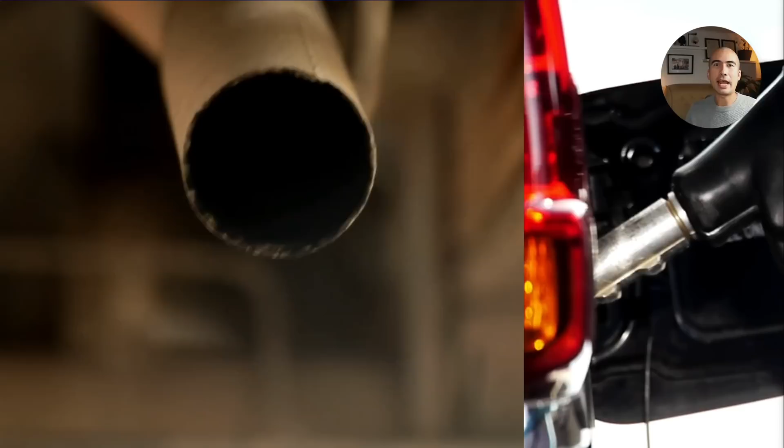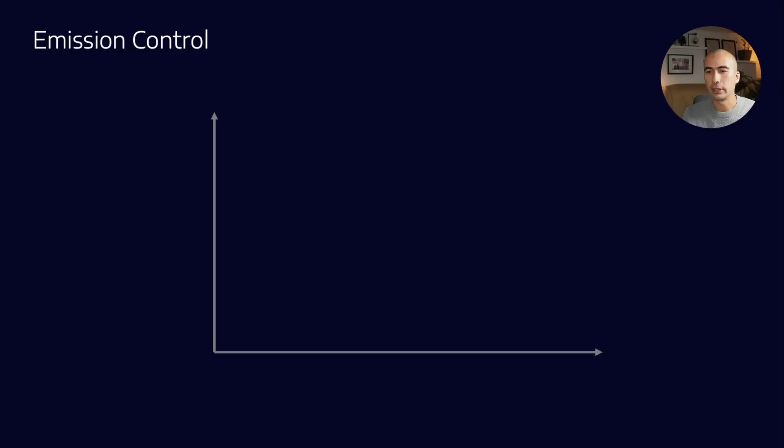So why is it that I split those two up? Let's look at emissions control for starters, and let's look at just the diesel engine oil specs. So as an example, there was mostly a focus on NOx as well as particulate matter. NOx is obviously the nitrogen compounds, and particulate matter is just solid particles in the exhaust.

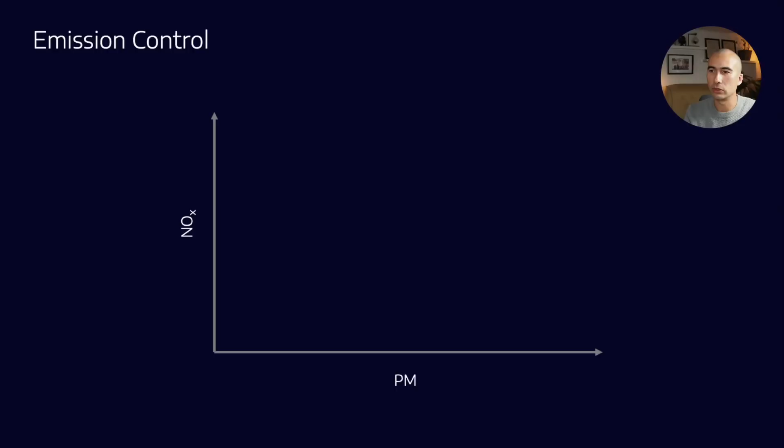And if you go back to what the CG4 regulations look like, when we moved on to CH4, it was a reduction in NOx. CI4 was a further reduction in NOx. And then we started emphasizing the particulate matter when we went to the CI4+.

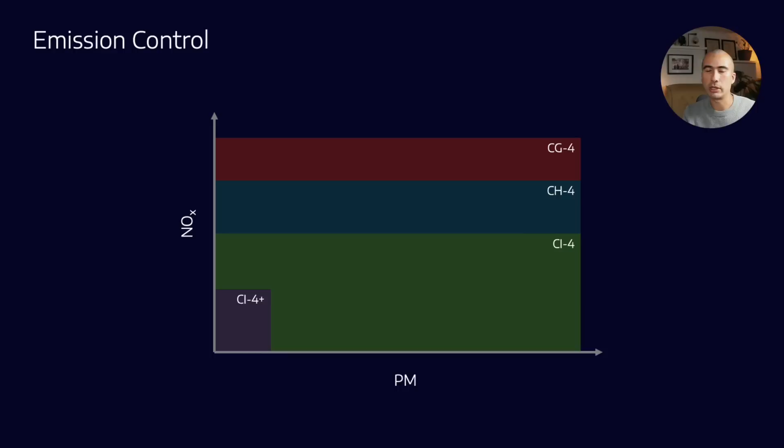And what you can see is that the allowable window of NOx and particulate matter got narrower and narrower as we went along. And if you had to put some years to it, that's really an evolution that happens from the mid-1990s right through to 2010. And obviously now we have the CJ4 spec. So to just put some numbers to it, you look at the reductions, and it's absolutely massive, and it's been a bit of a game changer.

Now, the oil regulations, or the self-regulation really of the industry, has gone along in conjunction with developments on the OEM side as well. So how did engine manufacturers and car manufacturers also meet all these quite stringent regulations?

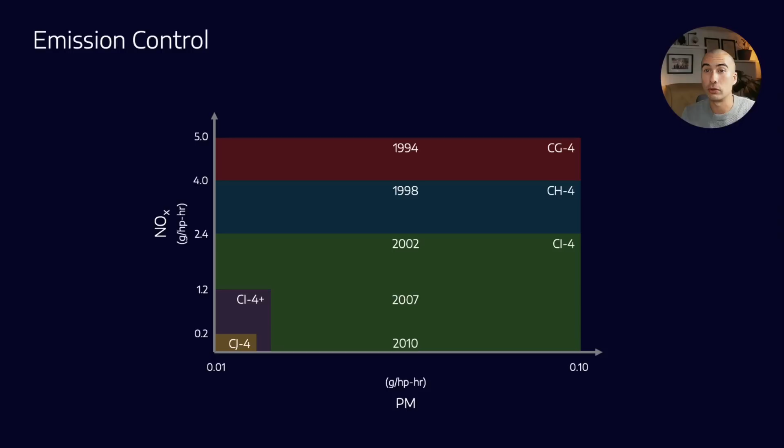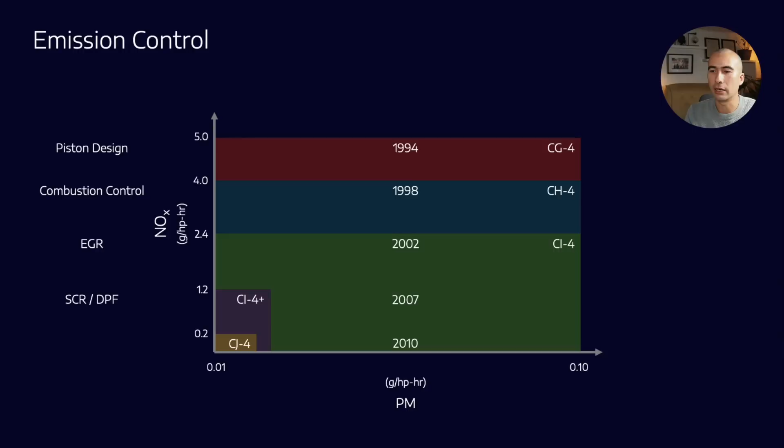Well, back in the 1990s, it was all about changing piston design. Then we had combustion control measures come in, things like exhaust gas recirculation, and then SCR and DPFs. That really helped us. And then on the fuel side, we also had a reduction in the amount of sulfur that was in the fuel, from 500 parts per million right down to 15 parts per million, which you would call ultra low sulfur diesel.

Now, if you just strip away all the detail and look at the progress we've made from the CG to the CJ4 spec, you can see that the window of allowable NOx and particulate matter has shrunk vastly, to the point where when they came to do the CK4 regulations, they realized most of the low-hanging fruit had already been taken up. Trying to reduce NOx and particulate matter from CJ to CK4 wasn't really going to help any. So the only other real emission you can control is carbon dioxide emissions.

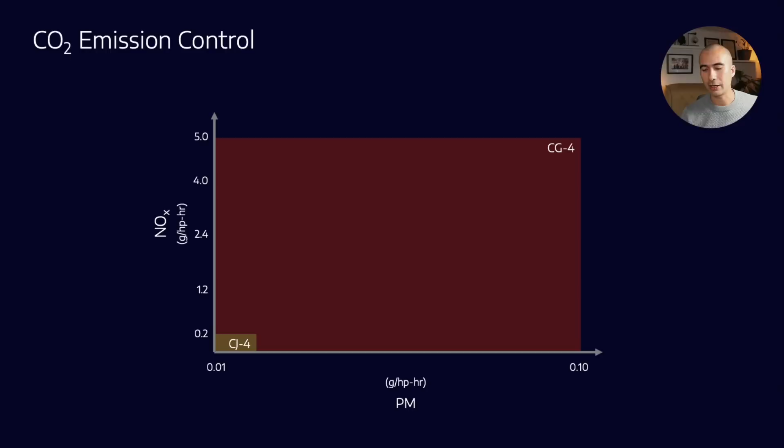Now, carbon dioxide emissions—trying to fix those at the tailpipe is a very difficult proposition. So the reality of CO2 emission controls is that you have to move into fuel efficiency, which just means you burn less fuel and therefore less carbon dioxide comes out the tailpipe. If you map miles per gallon, or fuel efficiency, against years for all types of vehicles, you see a very similar trend line, and it has a lot to do with market forces as well as government forces.

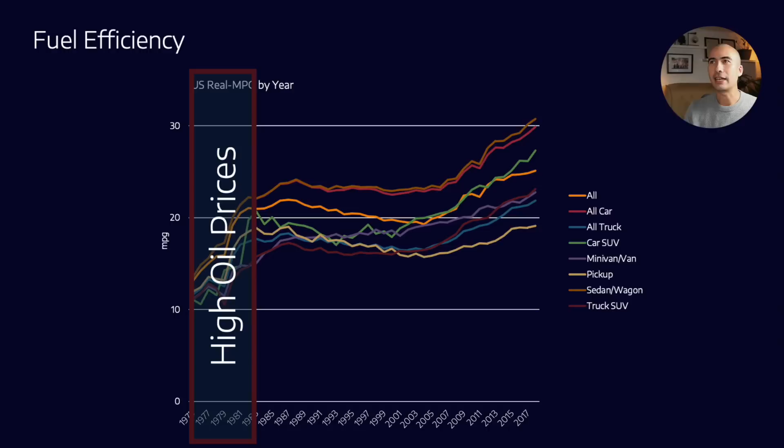If you stretch back into the 1970s—for those of us who were around at the time, that's not myself, but some people on the call may have been around and aware of the oil shocks of that time—when there was a period of really high oil prices, that drove the OEMs to gain much more fuel efficiency, because it was in their interest, and in the interest of the consumer.

After that, in the period from the 1980s through the early 2000s, we had relatively stable oil prices. We didn't have those massive oil shocks brought about by turmoil in the Middle East, as well as the cartel behavior of OPEC, all that kind of stuff. So with stable oil prices, there was less incentive to improve mileage on vehicles, and we saw a relative stagnation. From a regulatory framework standpoint, that's when you saw the emphasis shift to NOx and particulate matter emissions.

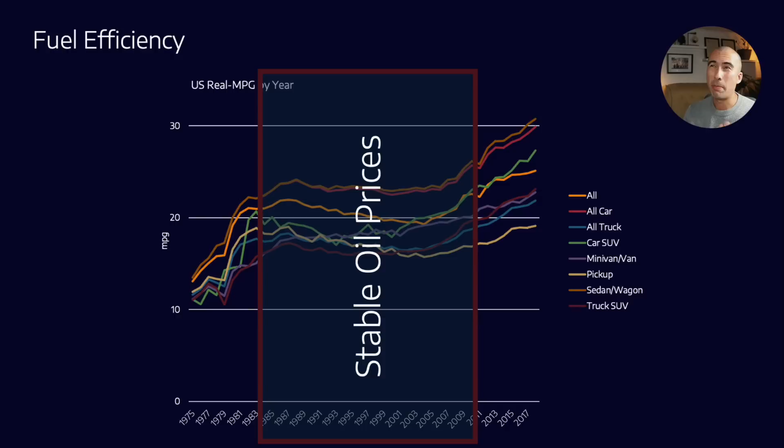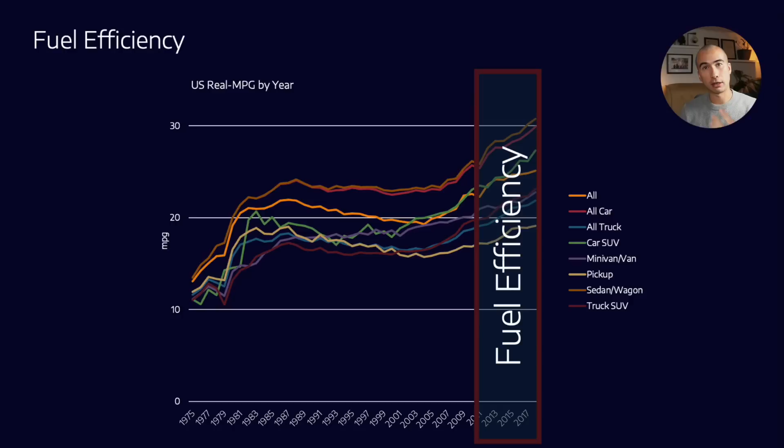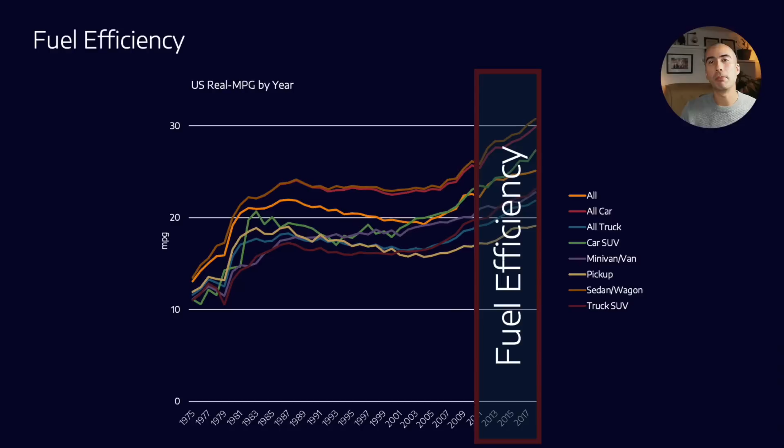If everyone can remember back to 2008, the oil price hit about $140 a barrel, which is really, really expensive. That, along with a lot of these sustainability criteria being brought around—a lot more emphasis on things like climate change—and government intervention, has made requirements on OEMs become a lot more stringent, particularly in Europe. That's where we've gone back to that fuel efficiency age, where now the OEMs are trying to eke out many more miles per gallon, as much as they can.

All right, so that's one story. Then we've also got the idea of changing market conditions. One thing you'll notice on the chart I put up with the emissions control is the reduction in sulfur that happened with the actual diesel. That actually happened in the lubricant space as well. So there are two triggers for that.

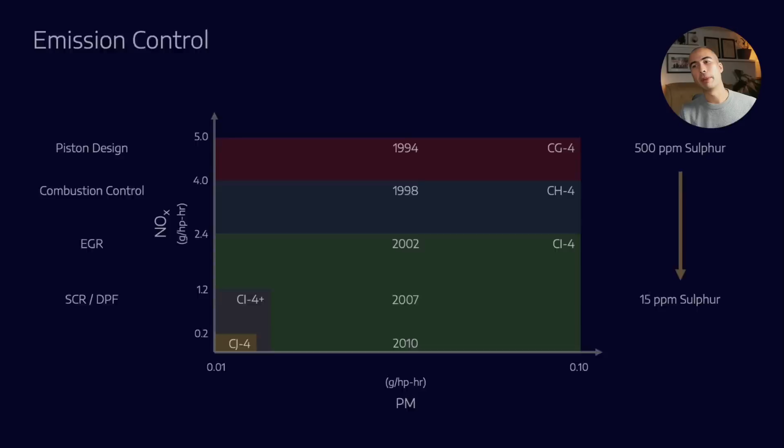One is that we just want to reduce the amount of sulfur, because sulfur compounds in the tailpipe can produce things like acid rain. If we have too much sulfur in the atmosphere, it's generally bad for the environment. The other thing sulfur and phosphorus—which is sort of the cousin to sulfur—do is poison the catalysts in our exhaust systems. So there was a move on the part of the base oil providers to move to lower sulfur compounds.

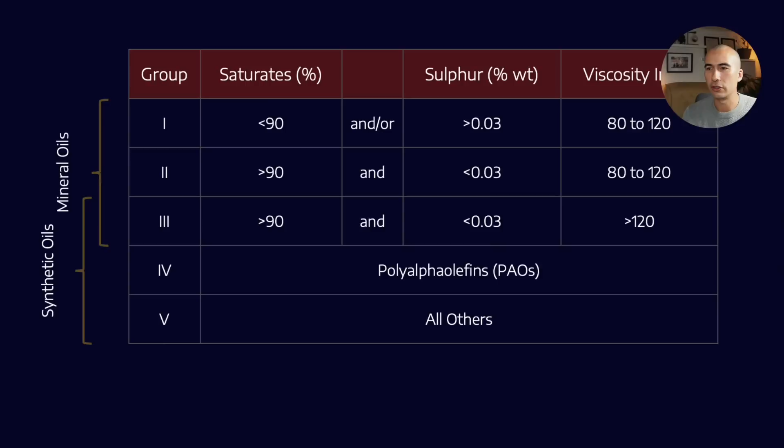Now, for anyone who's not familiar, base oils are grouped into what we call the 5 API groups. Groups 1, 2, and 3 are what we would call mineral oils, and the distinguishing factor between those is more or less the sulfur content. You can see over here that the sulfur content of a Group 1 is much higher than that of a Group 2 and a Group 3.

Now, Groups 3, 4, and 5 are known as synthetics, and I'll get into a bit how Group 3 came to be known as, or regarded as, a synthetic oil. But what that really drove was a move away from Group 1 oils, which were in many ways the standard in a lot of diesel engine oils, as well as passenger vehicle motor oils.

That drove us into what you would commonly call higher quality base stocks—Group 2, Group 3, and Group 4. So market forces helped drive engine oils away from Group 1s into what we would call higher quality—I use air quotes because Group 1s are very good in very specific applications, but in vehicles where you want a high viscosity index, meaning the viscosity changes very little with temperature, you want a Group 2 through 4.

Alongside that, we also have a paradigm of changing legal definitions. And in order to tell this story, which is really the story of how minerals became synthetics and how marketing departments all over the world kind of screwed up the nomenclature, I've got to take you back to the 1990s.

In the 1990s, things were much simpler. In the lubricant space and in the oil markets, a mineral was very obviously a group 1, group 2, or group 3 oil. And if you had something synthetic, that very clearly referred to a PAO, which is a polyalpha olefin, a PAG, which is a polyalkylene glycol, an ester, or an alkylated naphthalene.

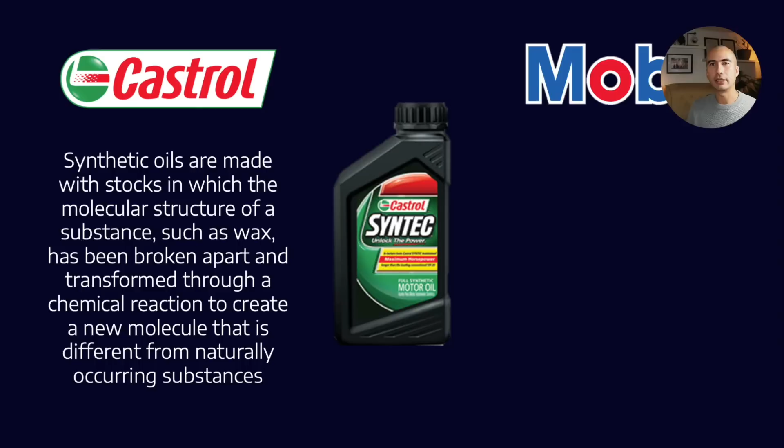So I guess if I were to take the side of Castrol, the argument you would make is something like engineered timber, which you use to construct a house. That has been so fundamentally changed from its raw product, which is a tree. By chopping it up into small particulates and including resins and all that kind of stuff, we have so fundamentally changed it that a tree and an engineered timber are completely unrecognizable from each other, and therefore engineered timber would be a quote-unquote synthetic product.

So that was the argument that Castrol was making. On their side, they happened to have some pretty good witnesses who'd actually won the Nobel Prize in chemistry not all that long ago. And so that was a reasonably convincing argument.

On Mobil's side, they said, hold up - the industry norm and what has always been understood is that synthetics are formulated from very small molecules. We subject them to a chemical reaction. These are not derived from crude oil that comes out of the ground.

So as an example, with a polyalpha olefin, you start off with ethylene gas - so it's a very pure feedstock, if you like. And by reacting those molecules together, you can build a much larger molecule, which gets you to a PAO.

As expert witnesses, they were able to bring in the EPA of the United States, the Environmental Protection Agency. Funnily enough, Exxon was on their side - you've got to remember this was pre-merger, so Exxon and Mobil were two entirely separate companies. They also brought evidence from Castrol's own website at the time. Now, late 1990s, so the websites weren't all that great, but you can imagine that Castrol's own website was effectively saying that the synthetic definition agrees with Mobil.

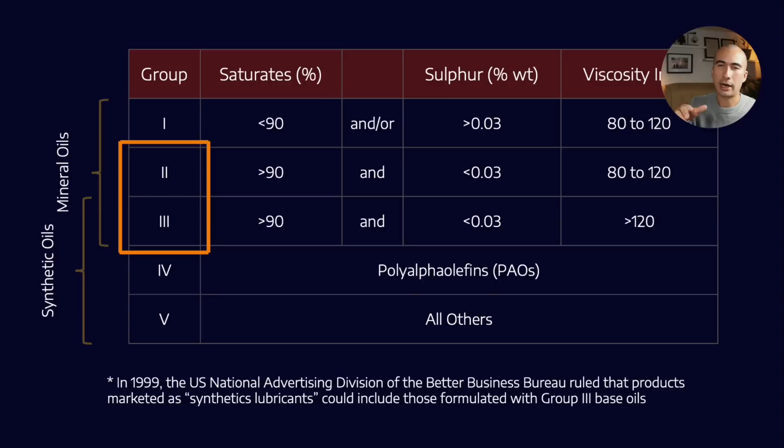All right, let's talk about the next factor helping to drive changes in engine oils, and that's changing base oil technologies. You might think that base oil technology is kind of fixed, right? We've had minerals and we have PAO synthetics. It's been like that pretty much since the 1970s, and there really hasn't been all that much evolution.

But in fact, there's been quite a lot of moves in the base oil space, and the big player I'll talk about here in the engine oil market has been the rise of what we call gas to liquid technologies. Obviously new technologies in the refining space are expensive, they take a lot of money, and you've got to build a lot of infrastructure. So any changes happen quite slowly.

The gas to liquids process is predicated on the idea that you can take small molecules and turn them into larger ones. If that sounds familiar, that's exactly how I described the process of making a full synthetic Group 4 PAO, right? You take ethylene gas, react them together, and get a very pure, high VI product in a PAO. With GTL technology, they've taken that fundamental idea and said, well, natural gas is predominantly methane. Let's use a very similar process to get ourselves to a product that looks a lot like a Group 4.

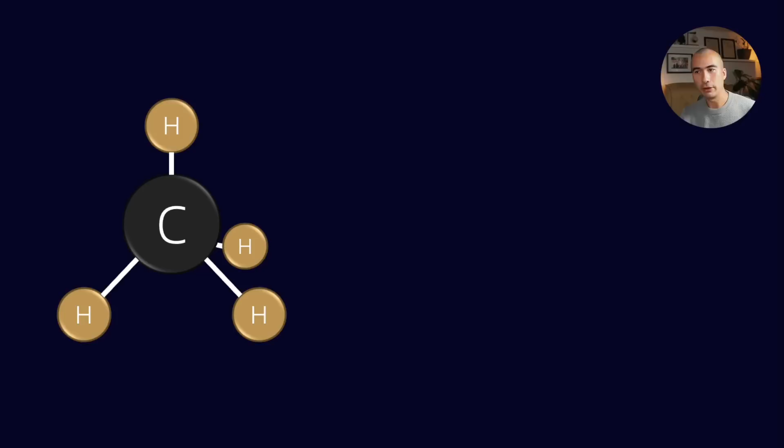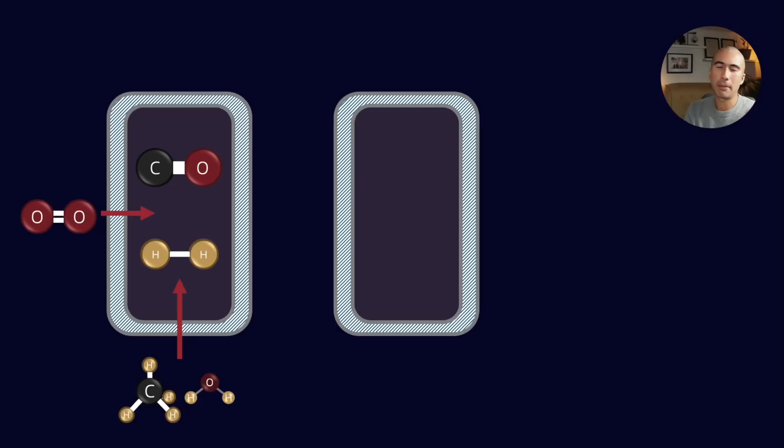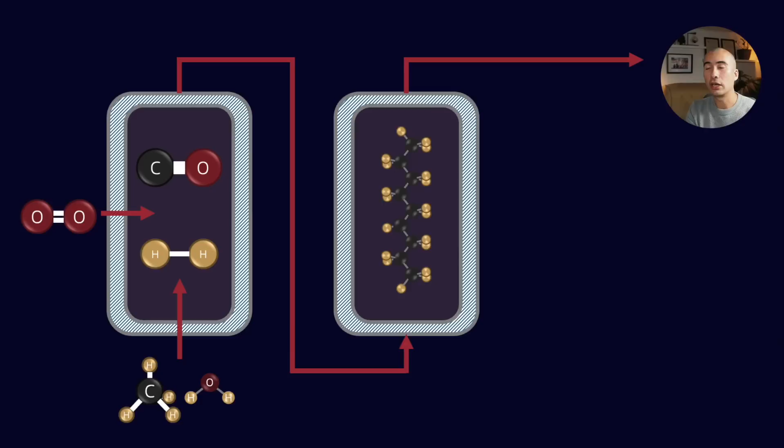The actual chemical process used is called Fischer-Tropsch. You don't really need to know how it works, but the quick rundown is: you take methane, water, and oxygen, react them together, and you get carbon monoxide and hydrogen. Once that moves on, you can effectively turn these into long chain waxes. Using these waxes, you can either sell that wax, or put those paraffin molecules through what's called an isomerization process, and get yourself either naphtha, diesel, or lubricant.

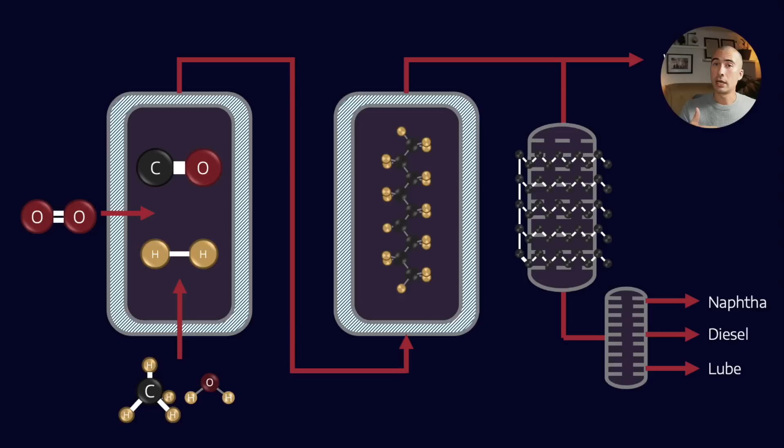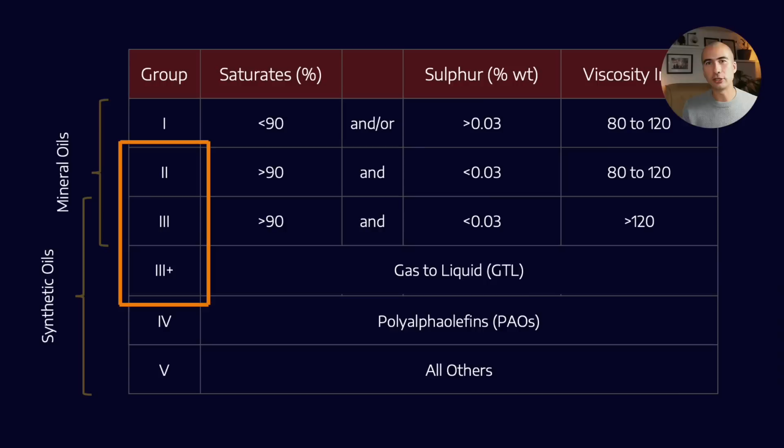Now, the biggest proponent of this is Shell. They have a huge facility in Qatar, the Pearl GTL plant, and they make vast quantities of it, and they're the biggest player in the market. Shell Base Oils actually sells this product into other companies, in the same way that ExxonMobil Chemicals sells their PAO technology on the open market to everyone. Shell Base Oils also sells the GTL product to everyone. And so that's really changed the shape of what this chart looks like, because now you can insert another line, which is Group 3 plus, and it's not quite as good, but has comparable properties to a polyalpha olefin, but at a lower price point.

Now, I might jump in here briefly, because you're probably asking: if this is such a good technology, why isn't everyone leveraging GTL technology? This goes back, again, to the way that oil companies operate. You've got to remember it's a huge investment to make a facility like this. In fact, ExxonMobil was the original pioneer of the GTL technology, and they ended up licensing, I believe, and ultimately selling it to Shell.

Now, the reason for that, you might think, if Shell has been so successful in promoting these on the open market, why is it that other companies haven't jumped in? It's been a very profitable business for Shell, and in many ways, the demand is oversubscribed. They actually can't produce enough GTL to keep up. So you might think, well, that's a really good thing for Shell.

At the same time, times like what we're living through now is when they kick themselves that they have this GTL technology. Because of what's going on in Europe at the moment with extremely high gas prices, most oil companies would much prefer to take the natural gas they derive out of the ground, send it over to Europe, and sell it at a huge premium. That's what they really want to do. But because Shell has committed to putting a huge amount of gas through their refinery, turning it into GTL liquids, they're constrained in doing that.

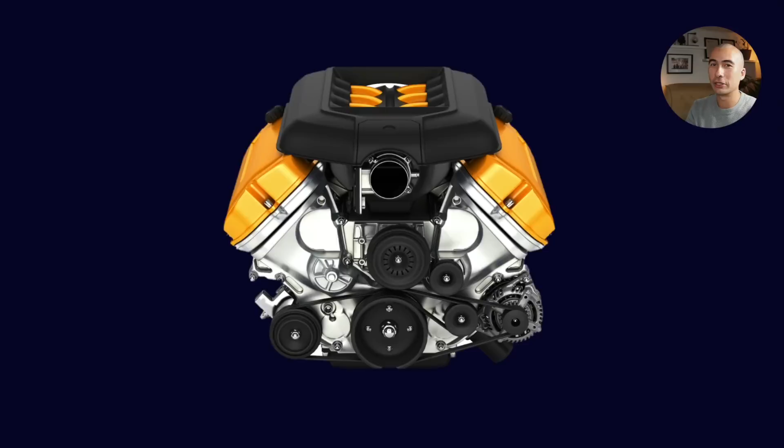Now, why is this new service category required? What are some of the changes in engine technology that precipitate new oil technologies? Well, it all comes down to this mantra of fuel efficiency. The way OEMs have gone about it is to introduce a number of changes to our cars. One thing you've probably noticed is that engines are getting much smaller. Before, a 1 to 2 liter engine would have been laughed at, but these days that's reasonably common.

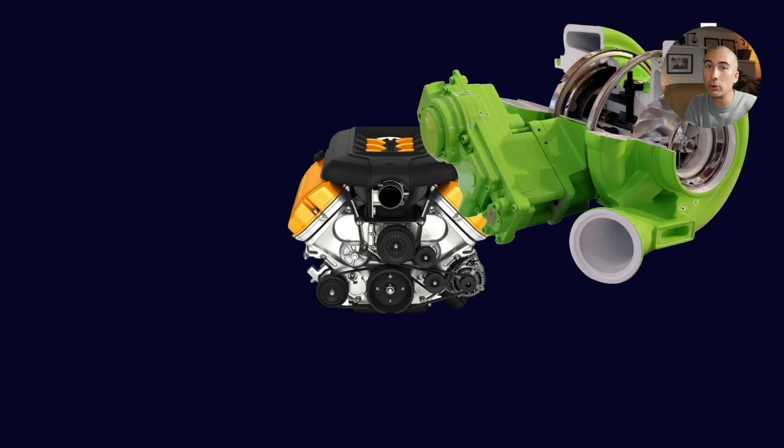One of the other things much more common in the modern era is turbochargers. You see small turbos on virtually all cars. Direct injection, stop-start at the lights - I know that's an annoyance for almost everyone, but that has become a very common technology that you really didn't see pre-2010. Hybrids are another way of getting fuel efficiency, and of course changes in the formulation.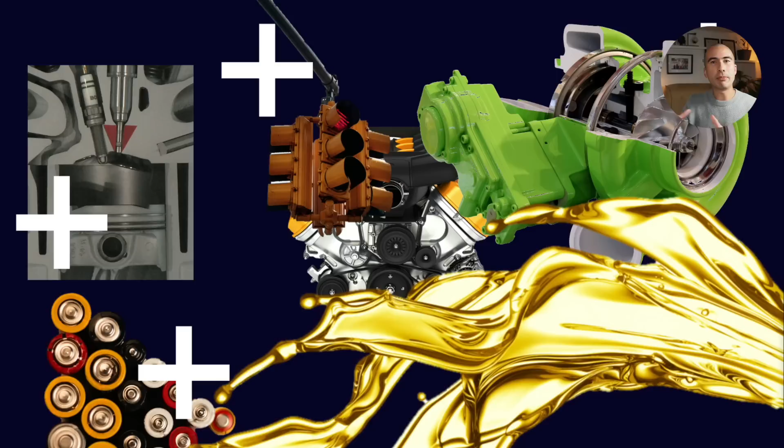But anytime we make these changes, there are unintended consequences. And probably the biggest unintended consequence of all the recent changes has been LSPI. Now, I'm probably preaching to the converted here - you probably know this phenomenon better than I do. But just to cover it, LSPI is low speed pre-ignition, and it's a little bit different. I'm going to show the standard combustion cycle here.

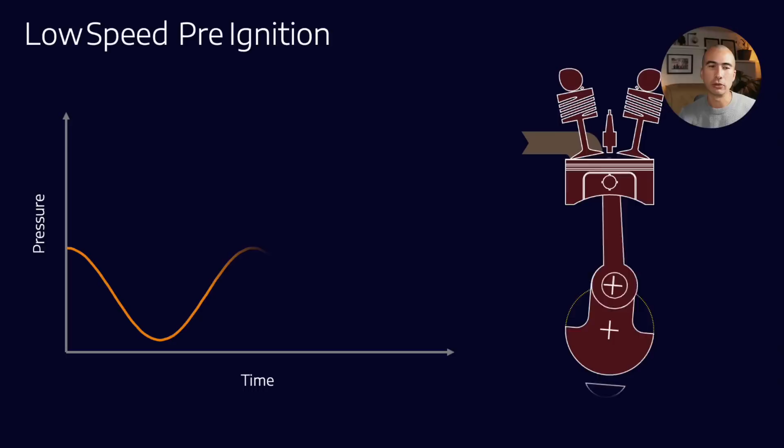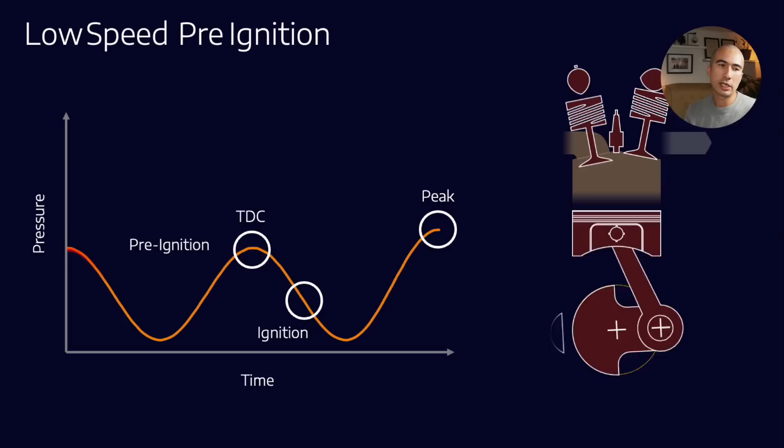You expect what we'd call a waveform, which looks pretty regular. Ignition happens - the spark ignition that happens in most cars - happens a little bit after top dead center. Now, with low speed pre-ignition, what effectively happens is we have an ignition event that occurs before top dead center, causing a wavefront going in opposition to the motion of the cylinder, and that causes all kinds of vibrations, which ultimately are really bad for the engine.

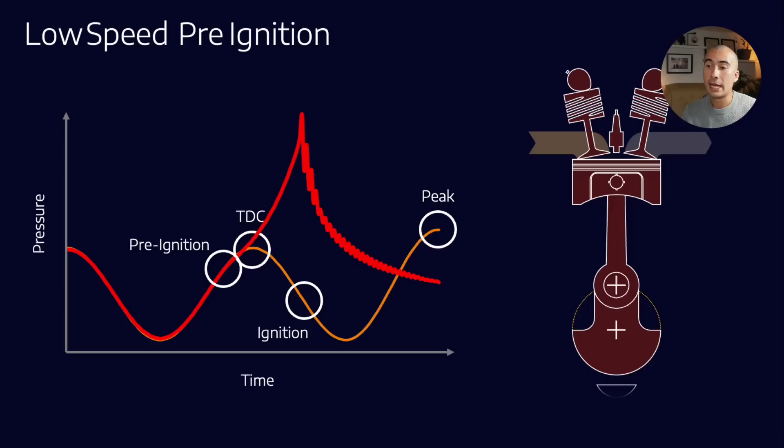Now, the OEMs have been working really hard trying to pin down the exact causes of LSPI. The reality is it's still a bit of an unsolved murder, if you like, but they've been able to narrow it down to a few common causes. One factor is that it's called low speed pre-ignition because it tends to occur at lower speeds and higher loads. It's much more common in turbocharged direct injection engines.

So again, that points to a lot of the new technologies that we've brought about to enhance fuel efficiency. But on the lubricant side, one thing that was maybe not well understood until quite recently is the fact that detergent chemistry plays a part.

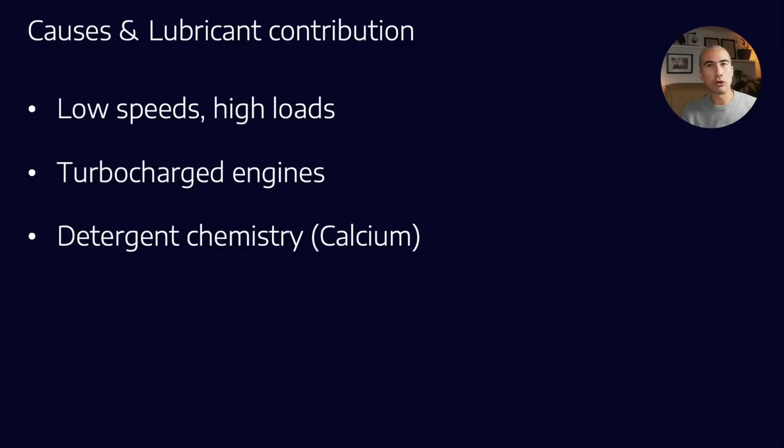Now, you might be saying, what exactly are detergents and what do they do? Funnily enough, the detergent in your engine oil operates much the same as the detergents you use at home. This picture always amuses people - this is not a grade 10 chemistry class. But what it is, basically, is a molecule that is trying to attach itself to polar compounds.

So let's go back and review a little bit. When I use soap in a sink, what I'm trying to do is remove grease that's on, let's say, my plate when I'm doing the washing up. So most of the bulk liquid is water, and I want a molecule that is soluble in water but will attach itself to grease and then help the grease be washed away.

Now, detergents in oils are exactly the same, but they work in reverse. Rather than everything being water, everything is oil, and they're trying to attach themselves to molecules that look like water - polar compounds - and that's how detergents work. Detergents have a little tail, which is generally a long chain of oil, and the head, which is charged, is generally a metal. So there are calcium based detergents, magnesium based detergents, sodium based detergents, and things like that.

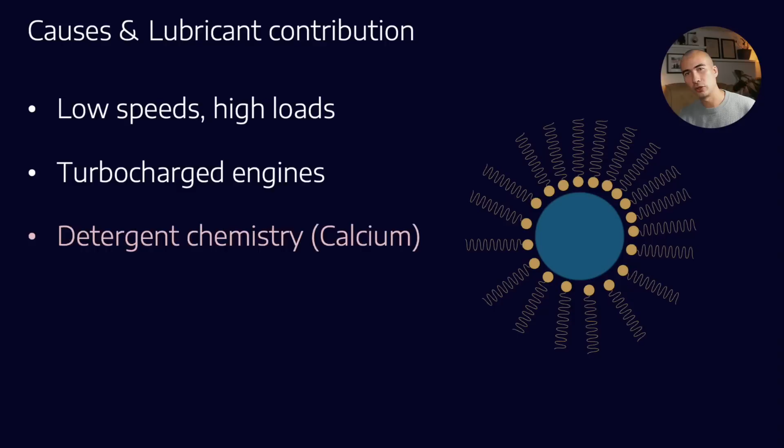What we found was that calcium detergents, which were far and away the most common in the industry, were actually causing LSPI. That's driving us towards removing the calcium in a lot of formulations, and that will change how engine oils look. Now, when you look at the evolution of, let's say, the S category, from the 1990s right up until now, we had SH, SJ, SL, SM, SN, SN+, which was a bit of a stopgap because SP was taking so long. And then finally, we've gotten ourselves to SP, which is the GF6 category.

Now, with SH, there was an additional one test over the previous. Then we had one test for SJ, 4 for SL, 1 for SM, 1 for SN, an additional 1 for SN+. The SP classification has required an extra 7 tests to pass. And this is all because of LSPI.

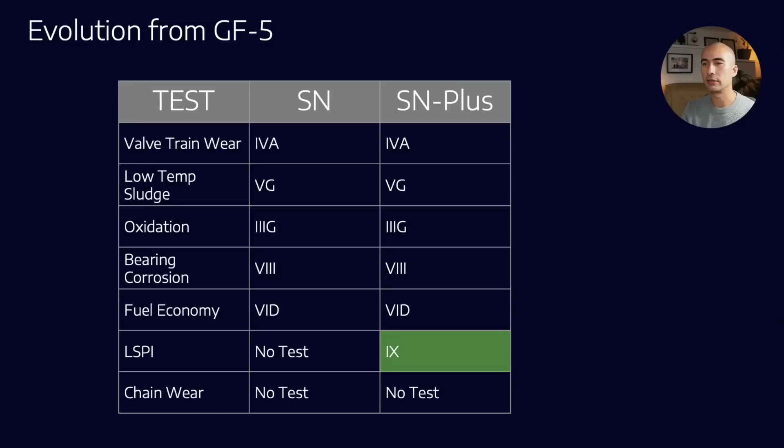So if we look at the actual tests, and the evolution from GF5, we had the SN category. There were a certain number of tests that your oil needed to pass. SP was taking forever, so we put in an interim measure with SN+, which had one additional test to confirm that your lubricant was not a contributing factor to LSPI. And then with SP, we introduced a whole raft of different changes.

And they're all driven by very specific things that we're trying to accomplish. So we're trying to get better fuel economy - remember I said we are in the fuel efficiency age. Everything about engines and lubricants is about trying to improve fuel economy. We also want LSPI protection, because that was an unintended consequence of a lot of the changes the OEM has made.

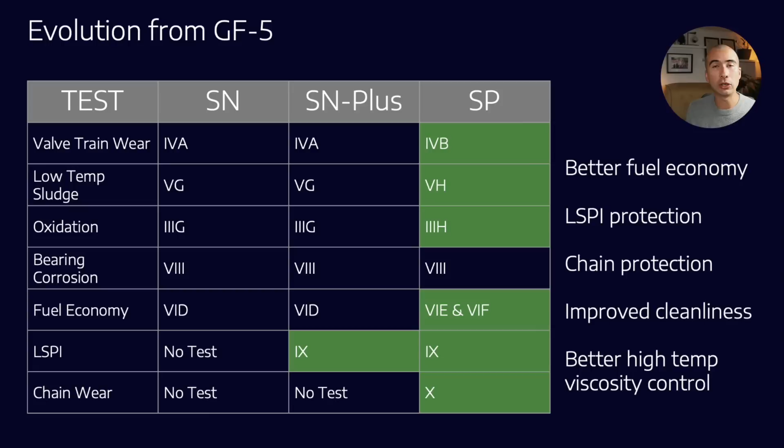We want chain protection, improved cleanliness, and better high temperature viscosity control. Some engines are running at higher temperatures now, and that oxidizes the oil faster and could potentially cause more deposits in the system. So that's why we want to improve the cleanliness of the formulations.

So what does that mean going forward? For better fuel economy, ultimately it's going to lead to lower viscosities. I remember the first time I heard that there was a 0W20 in production - that seemed completely insane to me. Now we have a 0W16. So lower viscosities - if you have a less viscous fluid, the engine has to do less work to move that fluid, and because we lose less energy, that results in better fuel economy.

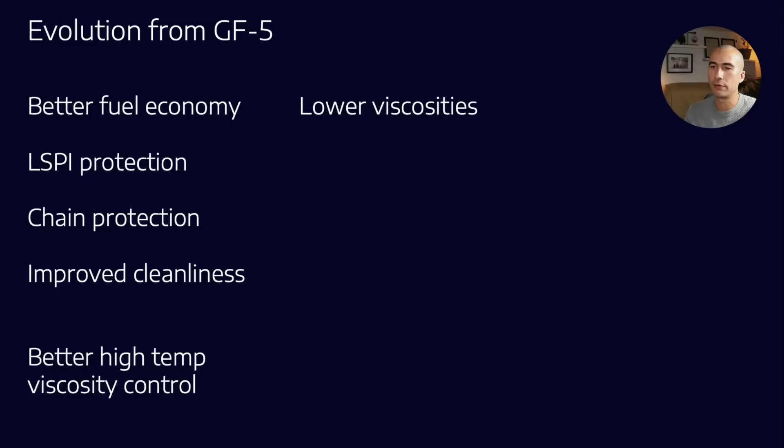For LSPI protection, what you're going to see in terms of changes in the formulation - if you did an oil analysis test, you'll see less calcium and much more magnesium. For chain protection, you're going to see more ashless anti-wear. That's part of a move to reduce the amount of ZDDP.

So whenever you hear the term like high zinc, what that's referring to is a molecule called ZDDP, which stands for zinc dialkyl dithiophosphate, the most common anti-wear additive in the industry today. The problem with ZDDP is that it contains both sulfur and phosphorus, and both sulfur and phosphorus poison catalysts. So there has been a move over time to reduce the amount of zinc. But unfortunately, if you reduce the amount of zinc, you have to protect things like your cams in some other way, so you have to include more exotic anti-wear additives.

On the improved cleanliness side, there's a move to better solvency and improved detergents. Detergents help clean up the system, but you also want better solvency, the ability to carry deposits in solution. That's driving us toward things like esters in a lot of new formulations.

It also encourages more dispersants at higher weights, a pretty similar additive to detergents. Finally, for better high temperature viscosity control, we really need to move towards higher quality base stocks. Group 1 base oils are becoming even less common than they were before, and the engine oil market is dominated by group 3 and group 3 plus at the moment. You'll also see more synthetics.

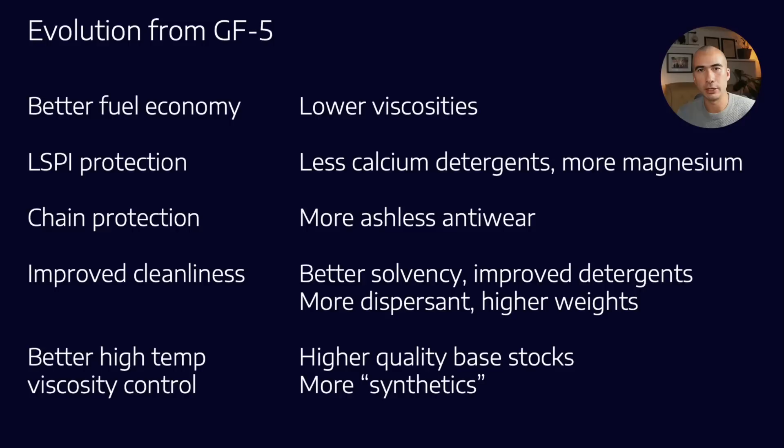I personally think there's actually going to be a bit of a move back towards PAO again, especially because the market for group 1 is starting to die off, and in the industry it's being replaced in the supply chain by a lot more PAO.

All right, hopefully that's given you a bit of a primer for all the changes that have happened. I know it was a lot, and I'm speaking quite quickly, but there are a huge number of changes that make the oil in your car today look the way it looks. It's external forces as well as innovations within the industry.

Now that really begs the question: what does the future look like? I think this is a really fun question to ponder, because ultimately it could go any number of different ways. One option no one really talks about is that things just kind of continue as they are. That's entirely a possibility, although the rate of technological change makes that, I'd say, a very low likelihood outcome.

Where I see there being huge potential changes is a move towards bio-based and biodegradable lubricants. We saw this a little bit in the fuel industry where everyone tried to move to bioethanol, but I can see it happening in lubricants.

Now, there's a couple of downsides to that happening. Basically all plant-derived lubricants are esters. A lot of synthetic esters, for example, you've probably heard the term before, like the idea of a synthetic ester - they are usually plant-derived. So all of the oils that lubricate jet turbines, for example, I think originate as palm oil for the most part.

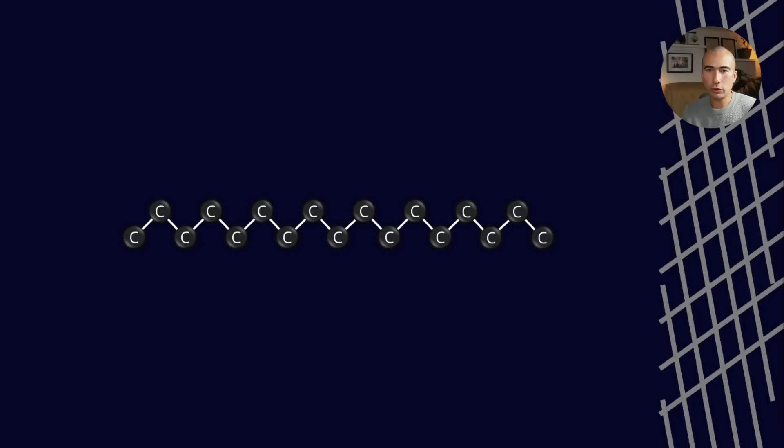With seals, their chemistry is actually almost as complex, if not more complex, than lubricants. They're a mixture of a base material as well as a whole raft of different additives, and you can think of them as being a little bit like a matrix. In order to swell a seal, the molecule of liquid lubricant has to be able to pass through that matrix and then enlarge it.

Now, there are a couple of ways that we can tweak the molecule to prevent that from happening. One is just to change the shape - double bonds tend to bend the molecule, and this means that if it tries to get through the matrix, it's just going to butt up against it. The other way is to increase the size of the molecule.

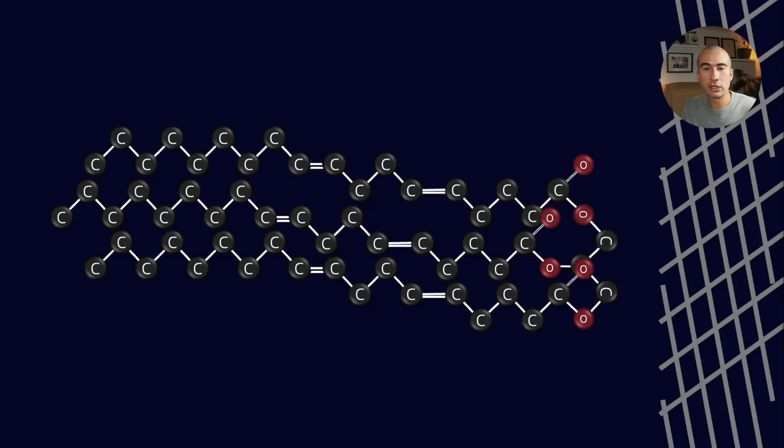There are some really interesting and innovative companies - I talked to one in the US called Biosynthetic Technologies, where they are taking esters and making them so large that they actually can't fit through the seal matrix, and therefore they don't swell seals. If anything, they actually shrink them a little bit. That's an interesting development which makes bio-based lubricants a little bit more feasible.

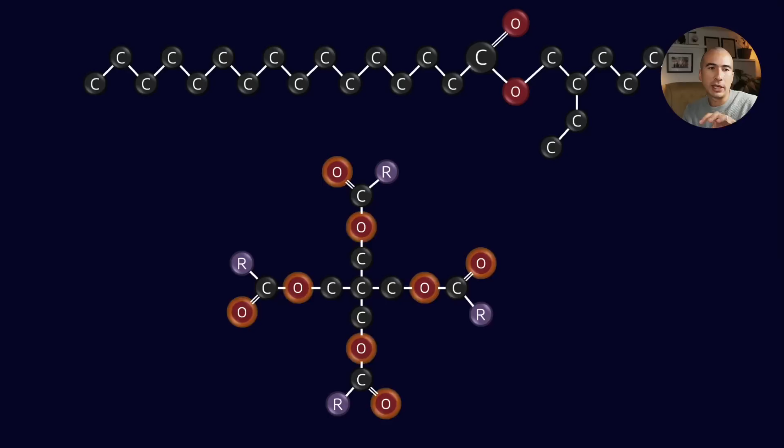The other thing they've been doing is fixing the water stability. This is called hydrolytic stability, where basically if water gets in with an ester, it causes it to break apart and form an acid. Obviously acids are not a desirable thing to have in your engine. So where water attacks, it tends to attack these various oxygen groups. What I'm showing here is a polyol ester, but you don't really need to know that - it tries to attack the oxygens.

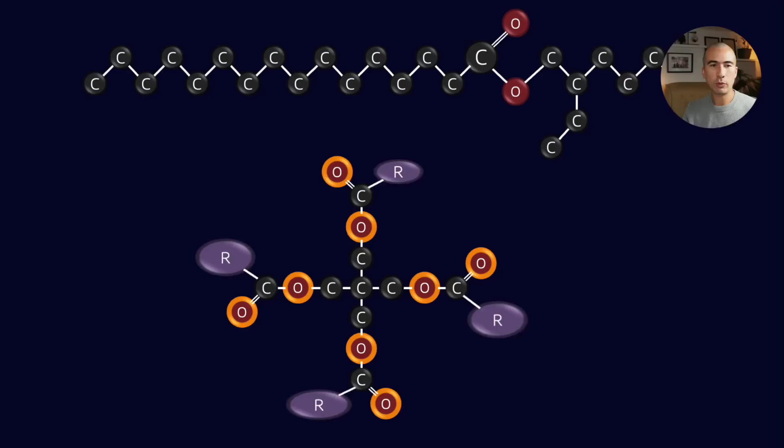So a lot of the innovations have been in how to change all of the hydrocarbon chains around those oxygens to, in American football terms, act like blockers - to try and prevent the water from accessing the oxygen purely because of the geometry of the molecule. By doing that, they've made them actually very stable in the presence of water, which is something that's really exciting.

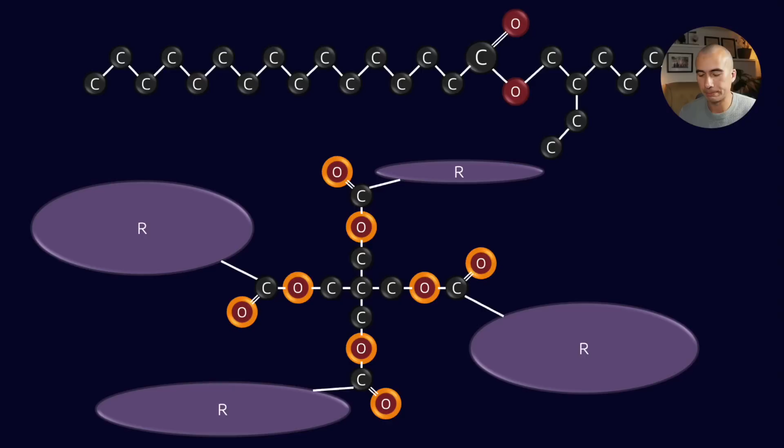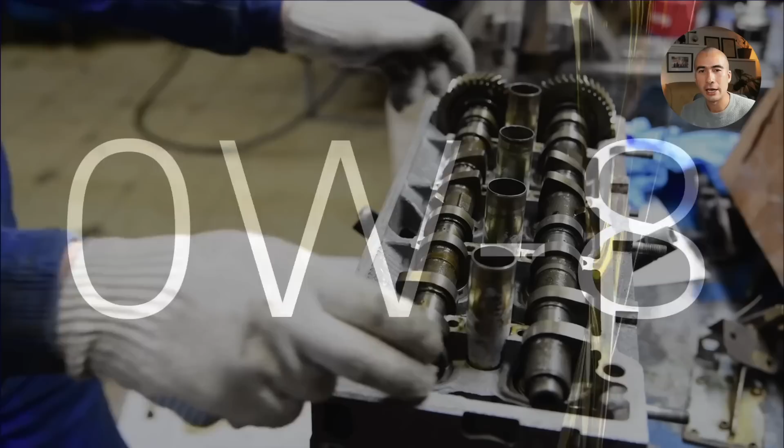One change I think we're going to continue to see, in some ways unfortunately, is lower and lower viscosities in lubricants. What's coming is 0W8. I couldn't believe this when I first read about it two years ago, but it looks like, especially the Japanese manufacturers, are looking at introducing a 0W8 spec. I think it's been formalized, and there are a handful of companies already selling 0W8, but that's a very low viscosity, and I've got questions about how things like the cams are going to hold up.

So what that ultimately means is that because lubricants are getting thinner and thinner, the additive package is going to have to do a lot more work than it used to. This is really driving huge changes in additive chemistry, which I think is a really interesting area of research and development at the moment.

What's generally happening in a lot of engine oils is that the actual base oil, which we used to rely on to lubricate all our components, is starting to take a back seat. We're having much more exotic chemistries being developed by additive companies to try and protect a lot of the engine components. So we're seeing a lot more molybdenum being used, some barium salts, a lot more boron, and a lot of that is to fix these changes.

It's also being designed because as we reduce the amount of ZDDP - zinc is this fantastic molecule because aside from poisoning catalysts, it acts as an anti-wear additive, so it can help protect your cams, your chain, your gears, and your oil pump. But it also acts as an antioxidant, so it has this dual purpose, and that's why it's been far and away the most popular additive. Replacing it is quite a challenge because there aren't that many molecules that can perform those dual functions, and certainly not at the cost point that ZDDPs have always been able to meet.

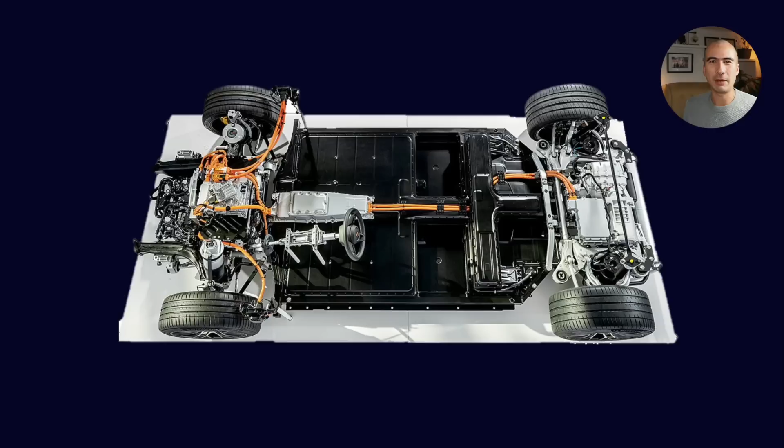But what's interesting about the EV platform is that they're more or less the same under the hood. You kind of have a skateboard platform. You've got the motor - sometimes there's only one and it's rear wheel drive, sometimes there's two, sometimes there's four - but they all look roughly the same underneath. Obviously, the Volkswagen Group has taken advantage of this, and I think the new Audi e-tron is effectively the Porsche Taycan underneath, just with a different badge and a different chassis on it.

So now the question is, what role do lubricants have in an EV world? Surprisingly, there's actually quite a lot. Some things are retained from the previous age of vehicles - fluids for your steering rack, greases for your wheel bearings, and all that kind of stuff stays exactly the same. There's really not that many changes.

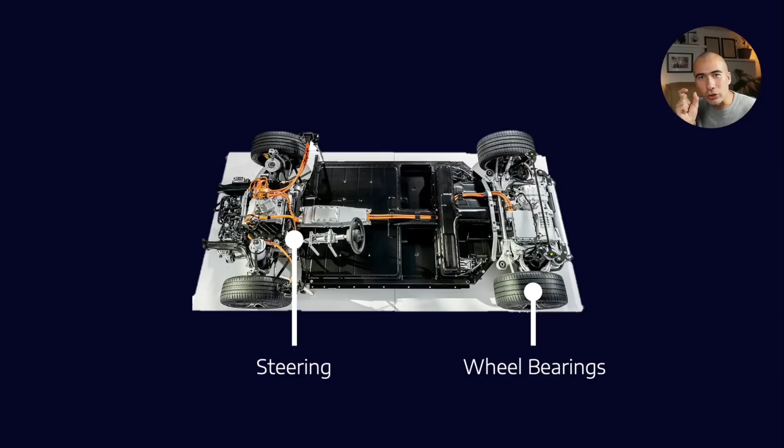The only thing I'd say is there's much more emphasis now on efficiency, because EVs these days are sold on range. So if you can lower the viscosity of the wheel bearing grease to help it go an extra couple of kilometers, the EV companies will do that. The other really interesting developments have been around battery cooling technologies.

So there is a bit of an ongoing debate at the moment about what kind of fluids do we use for battery cooling. You can take a couple of different approaches. The original Nissan Leaf, for example, had no cooling technologies, completely passively cooled. They just ran air over the system. That's probably not optimal.

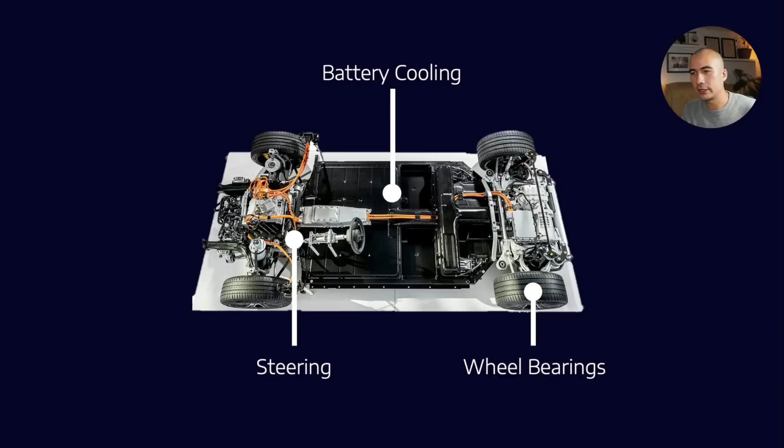Then you've got a whole bunch of companies that are cooling the battery with standard water-based, water glycol lubricants. And then you have companies like Porsche, which are trying to integrate the battery cooling in with the electric motors, using one fluid that is an oil-based system. The advantage of an oil-based system is that lubricants are what we call dielectrics, so they don't conduct electricity, which means you can have them in and around battery components without the battery shorting out. So again, that's a bit of an open question as to which technology wins.

And then finally, you've got the transmission and the motor, and the requirements for these are quite different too, because some of the time they integrate the transmission and the motor, so you've got to protect both the motor and the gearbox. And as far as formulations go, you often have competing interests.

So as an example, if you compare the requirements of the motor to the battery, what you really want for the motor and the battery is a very thin fluid, because if I want to carry as much heat around the system as I can, I want something that flows very readily - that helps carry heat away. But if I'm also lubricating the transmission, that requires a gear oil that is at a much higher viscosity at high temperatures. So how do I balance the two of those requirements out? Again, that's a little bit of an open question.

And the other thing that's kind of in conflict is that for the transmission, you want an anti-wear additive like zinc, but that's incompatible with the copper that's in the motor windings. So again, formulators are trying to come up with creative ways to get around that.

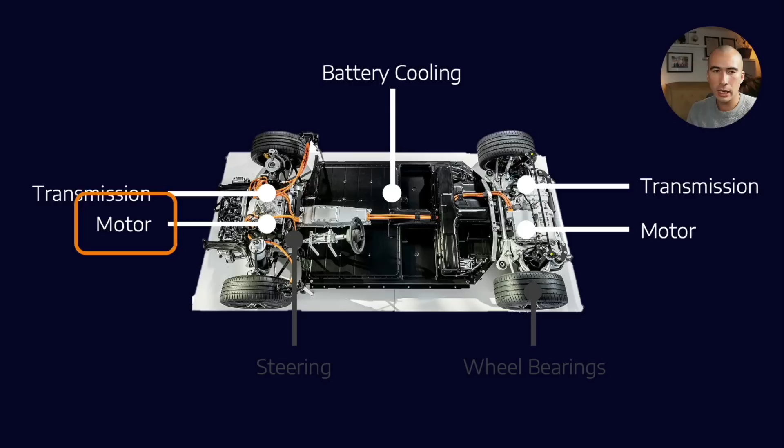The final bit of new technology, which is again a bit of an open question as to how this looks, is of course hydrogen. At the moment, I think a lot of the press and the excitement has been around the idea of hydrogen fuel cells. You take hydrogen, probably in liquid form, it gets stored in a canister, and that helps charge a fuel cell. And then from then onwards, it effectively works like an EV.

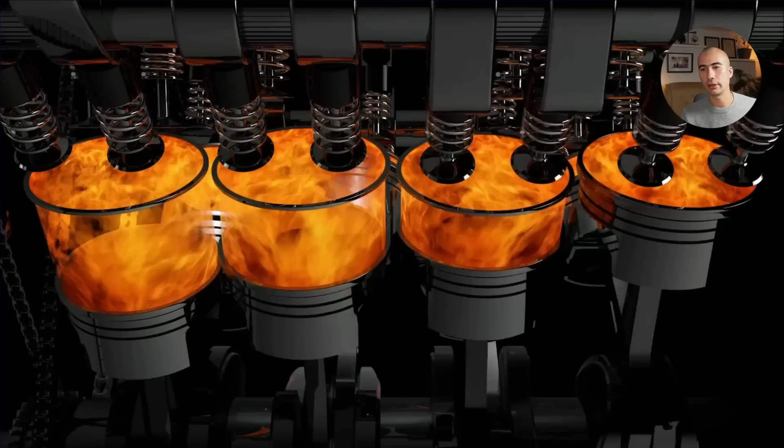But there are also changes afoot, because some of the industrial gas engines, like your Jenbachers and your Waukeshas, are actually moving towards hydrogen ignition engines. So it's the exact same engine, but instead of putting natural gas through it, you put hydrogen. Again, a lot of formulation changes are required for that, and changes in engine technology, because the flame temperature and flame speed of hydrogen are very different to methane and crude oil derived products. So that's one big change.

But also, when you combust hydrogen, you get water. So we're going to have a lot more water in our engines, and how do you deal with that water and filter it out? That could potentially become a problem with hydrogen ignition engines.

Anyway, that kind of wraps up everything I had prepared to talk about today. Hopefully that's given you two separate pictures - a bit of a story of how engine oils evolved over the last 10 to 20 years, and how that got us to where we are today, in an age where synthetics are quite important, but their definition is a bit up in the air. We also have a lot of changing chemistries involved, and a lot of that is driven by the fact that all the OEMs are after fuel efficiency. Fuel efficiency has become the king, and that's a bit of a mantra going forwards.

And then, how do engine oils look in the future? There's obviously still going to be a lot of demand for it, because there's a huge heritage fleet, and people are continuing to buy petrol vehicles. It's not like EVs have taken over yet. So there's a lot of work to be done on the petrol and diesel side. But as we start to get into new technologies, there is still a place for lubricants and lubricating oils. It's just that the volumes are going to change a little bit, and it will probably shift into more niche, higher margin products.